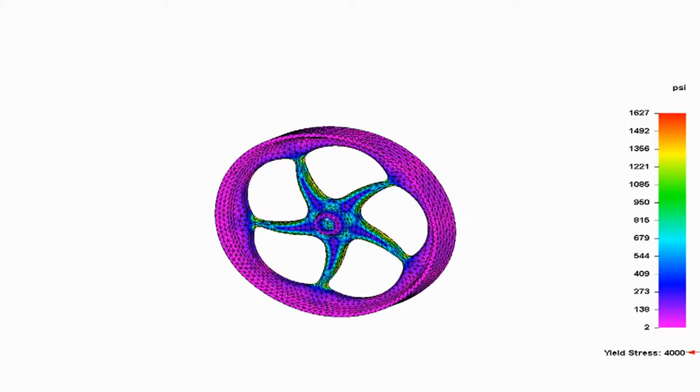Solid Edge ST6 introduces design optimization, providing designers with the ability to set up what-if operational scenarios to automatically predict how a part will react to specified loading conditions. This innovative functionality helps to develop safe and reliable products at minimal costs.

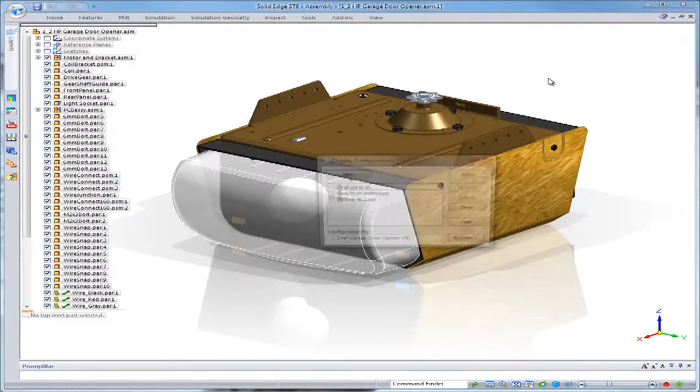In this demonstration, we'll study a sheet metal bracket which supports the motor and gearing for a garage door opener. We'll open the 5mm thick sheet metal bracket in Solid Edge and view the results of a previous analysis. A 0.19mm deflection of the bottom flange was computed, evidence the bracket is very stiff and therefore over-designed within the defined loading conditions in sheet metal gauge.

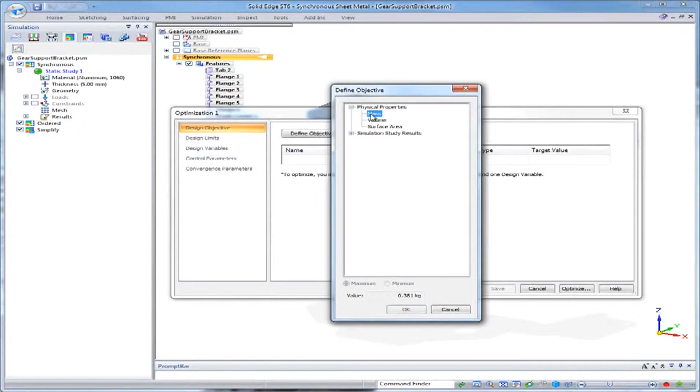Our goal here is to minimize the bracket's material while still providing a safe product. For the existing simulation study, we'll use the new optimization option to set our design objective. In this case, we wish to minimize the mass of the bracket while keeping the deflection less than or equal to 1 mm. We'll restrict the thickness of the metal to a range between 1 and 5 mm.

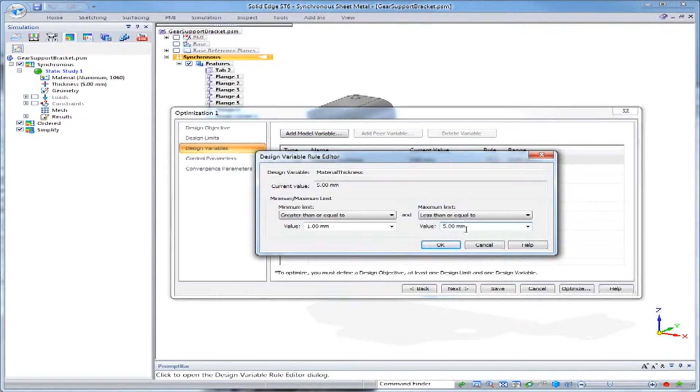Watch as Solid Edge iterates on various thickness values within that range. We could do this manually by changing the sheet metal gauge, solving the study, looking at the results, then repeating this process until we have an acceptable solution. But this could take hours to perform. With the optimization functionality, convergence on a solution takes seconds.

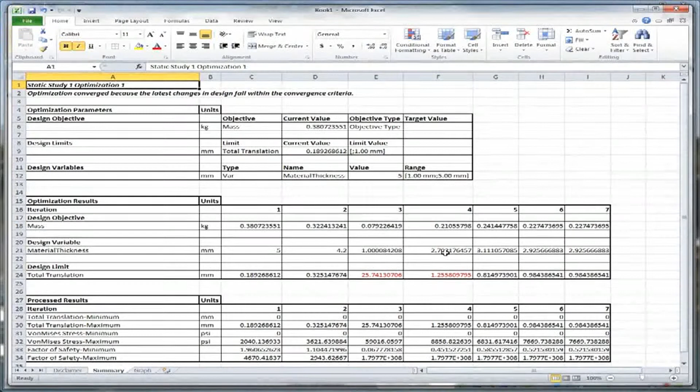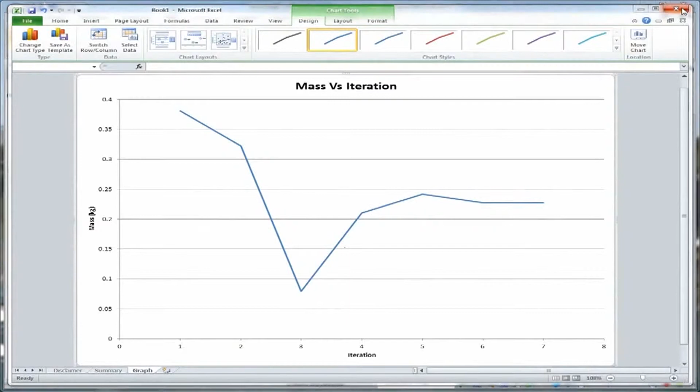When we review the results section of the summary spreadsheet, we can see that Solid Edge converged on a thickness of 2.93 mm, resulting in a deflection less than 1 mm. This convergence on thickness can be confirmed by looking at the graph of the bracket's mass iterations. Notice how the graph levels out in the final 2 of the 7 computations.

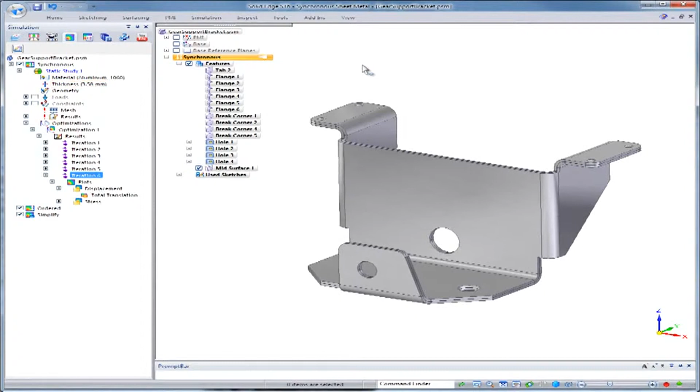Now that we have an actual thickness of 2.93 mm, which represents a minimized but safe amount of material, we can use that to guide selection of an available sheet metal gauge. As we search the Solid Edge material table for a thickness gauge, the closest we'll find is 12 gauge, or actual thickness of 2.77 mm.

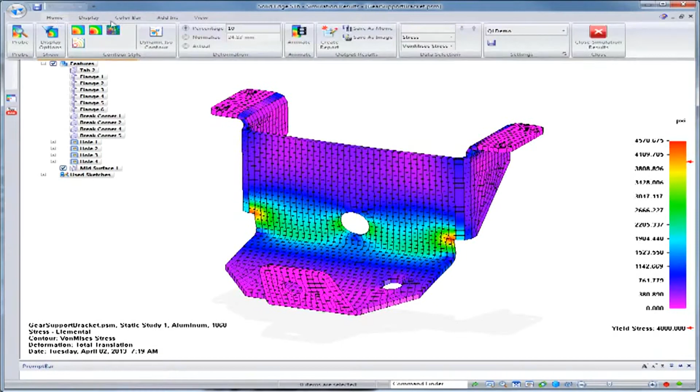For purposes of safety, we'll move up to a 10 gauge sheet metal gauge, which represents an actual 3.58 mm thickness. We'll apply that to the model, re-solve the study, and find that this new thickness results in a deflection of 0.54 mm, meeting our requirements to stay below 1 mm.

With the inclusion of design optimization tools in Solid Edge ST6 simulation, designers can reduce their material and engineering costs with confidence that safety and reliability goals are being met, all before building a prototype.